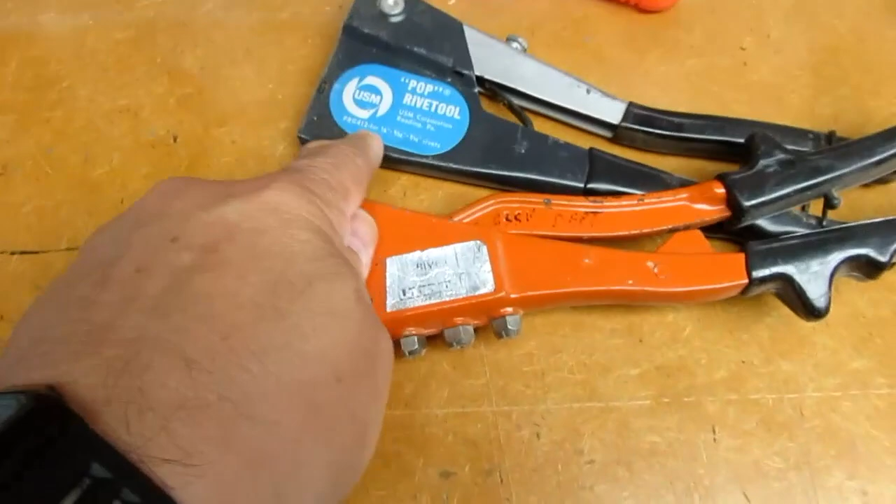In a recent video I did a little bit of riveting, and I lamented that my old pop rivet tools, although they were adequate in other riveting jobs I've done in the past that used smaller rivets, were getting a bit outclassed, and so I bought this still relatively inexpensive Arrow RHT300 swivel head rivet tool, which, like this one, but unlike the USM one, which only has two dies, this one does have the four common smaller sizes, just like this one does.

And I was finding that it was very difficult with the larger rivet, and I grant you a little bit of arthritis on my part, to squeeze it hard enough to break the, I can't think of the proper word, the shafts of the pop rivets off. So I was looking around for something a little better, and I had contemplated getting a pneumatic one.

And what I've got instead, I'm going to try it out, return it if it isn't good, is this Astro Pneumatic. It's their extra large Blind Rivet Adapter Kit for an electric drill. And this one takes not only the four common smaller sizes like you'd find in your basic hardware store tools and rivets, it also handles the larger 7/32 and 1/4 inch sizes. So it comes with all the dies for those, comes with the small wrench, and then the tool itself.

Now, it seems like a number of companies sell the same exact item, or at least things that are extremely close to it. So I don't think Astro makes this. I'm not sure they even designed it. But this is what they call their ADR14. And I think there's also another part number for that that I've seen somewhere.

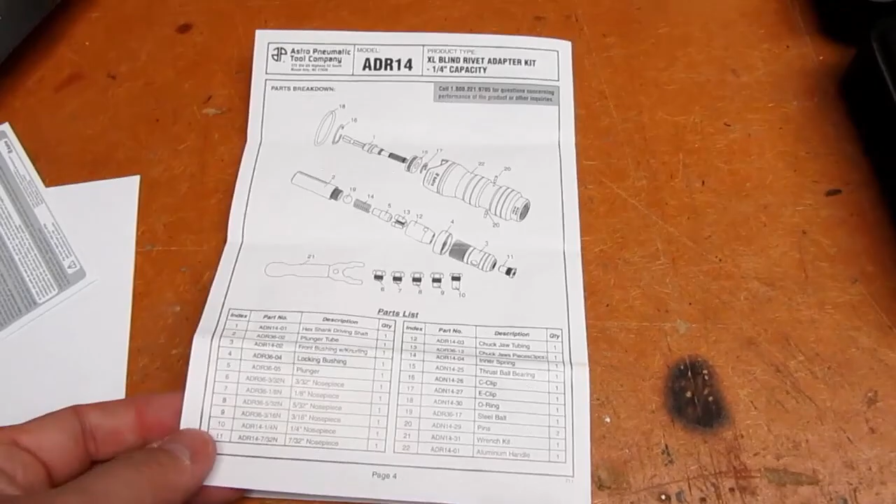So you've got a manual in here, 4 pages. Looks to be pretty good. Good illustrations and so on. And according to the manual, these are called nose pieces. I was calling them dies. Nose pieces does sound like a better word. And that's what they call a wrench kit. It's one part. I don't know how that qualifies as a kit. There's the parts breakdown.

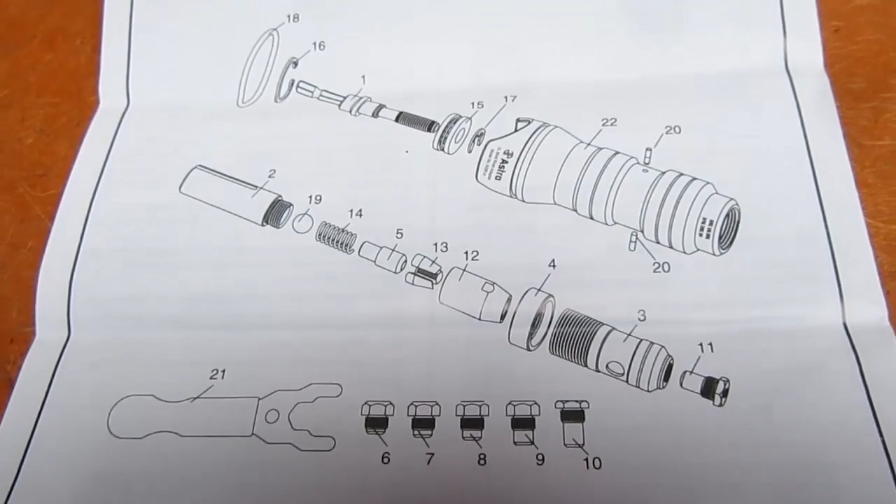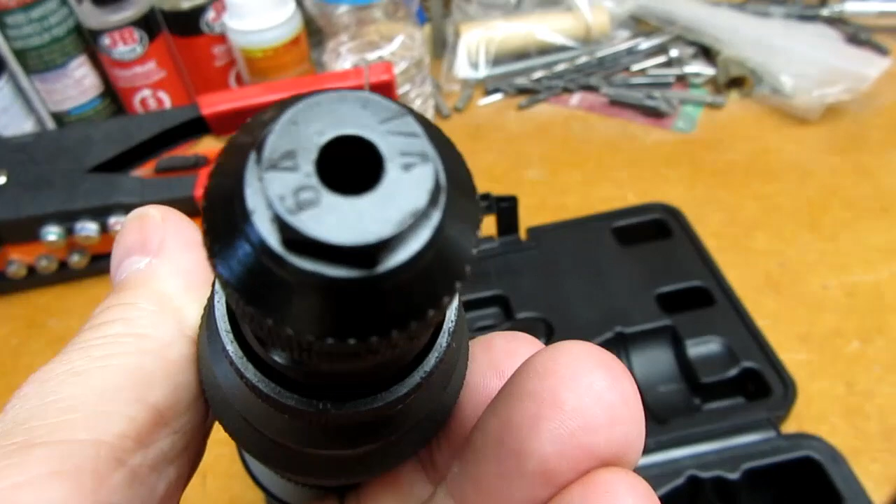The tool itself is apparently machined, although some of it may be part of a casting, I'm not sure. Machined aluminum. It doesn't weigh all that much, but this is where the nose piece screws in. One of the 6 nose pieces, the 1/4 inch one, comes installed on the tool, and then this is where you attach your electric drill using a standard 1/4 inch hex drive, just like any screwdriver bit or anything else you'd chuck up in a drill.

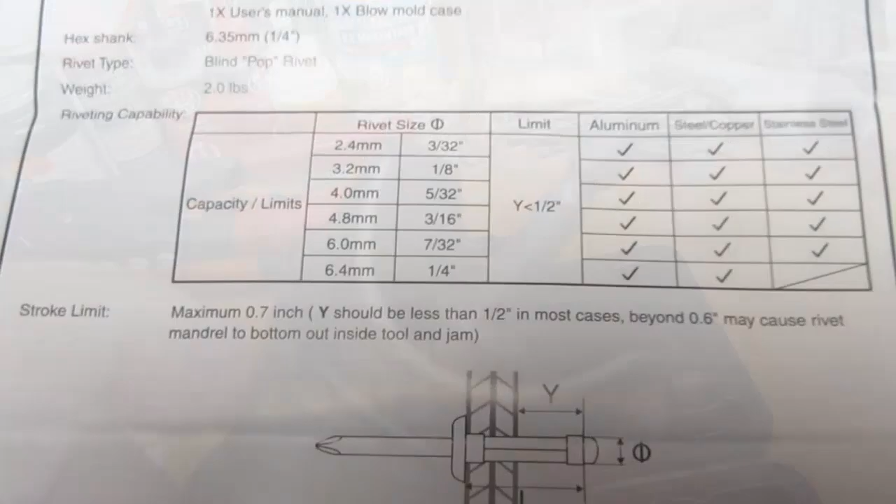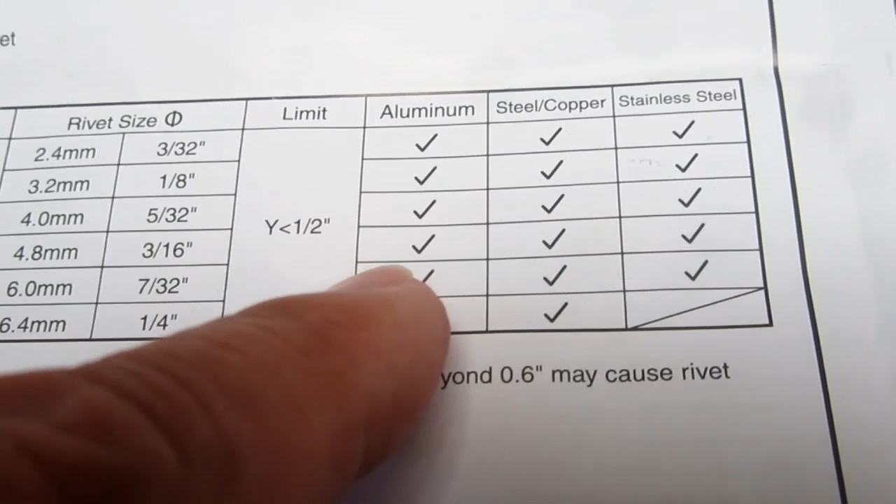According to the manual, the capacity of this tool, and it lists the 6 different rivet sizes here, and it mentions which types of rivet material. You can use aluminum ones in all sizes, steel, copper ones in all sizes, and stainless steel in all but the 1/4 inch size. And there's the so-called Y dimension, must be no larger, they show less than here, but the website says up to 1/2 inch. I guess if you're infinitesimally smaller than 1/2 inch, there's no practical difference.

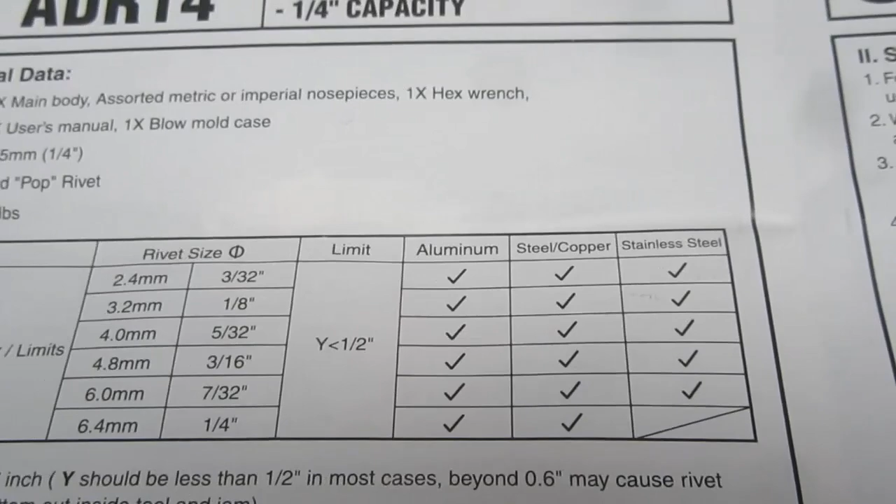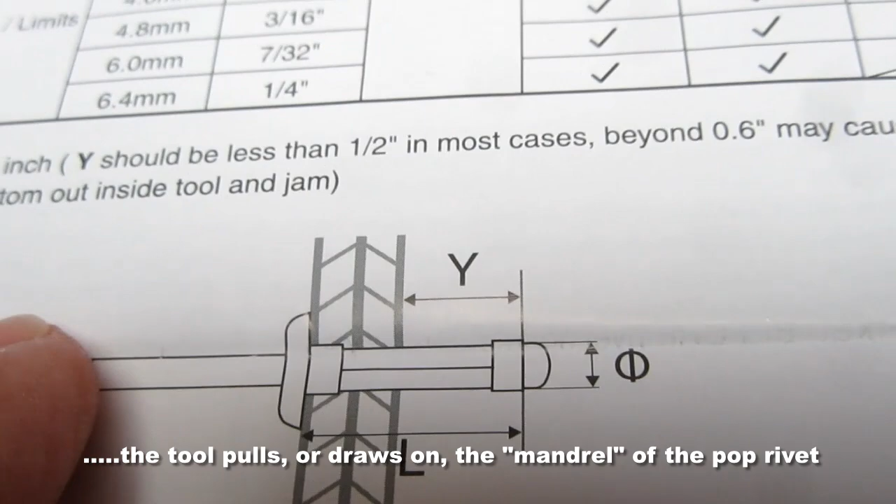And they show what they mean by that here. If you put your pop rivet through your couple pieces of material, the part that sticks out on the far side can't be bigger than 1/2 inch. So that's its draw capacity. I think that's just saying that the tool doesn't draw more than 1/2 inch when it pulls on this part of the rivet. If you selected a rivet that's too long for the thickness of material, you might get to a point where the tool just can't pull this enough to compress this part fully and make a tight joint. So I think that's what that comes down to.

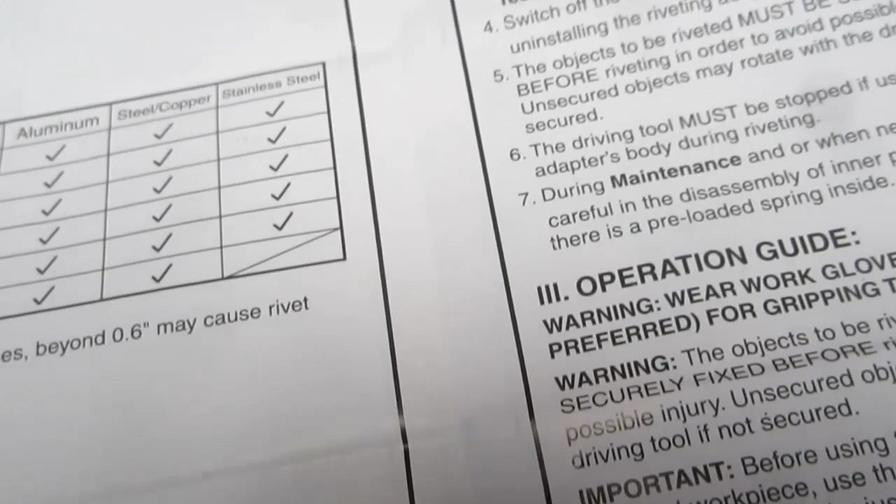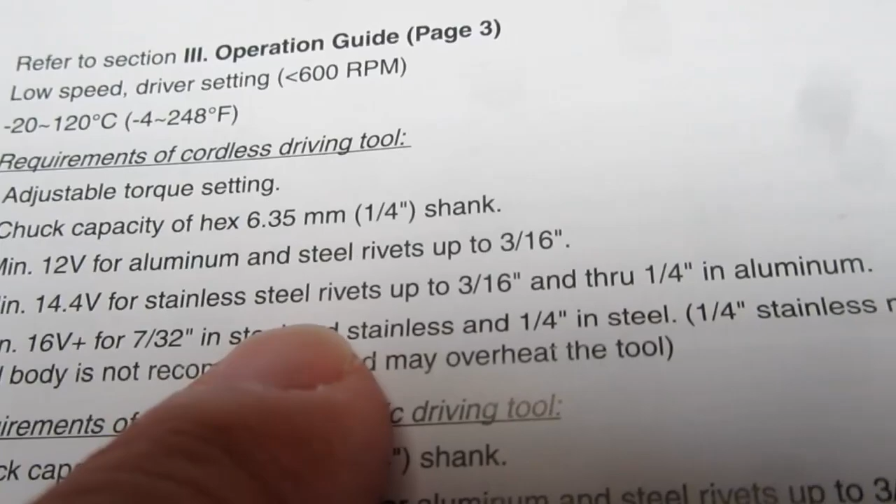So they recommend for the cordless driving tool, doesn't have to be cordless, you should have an adjustable torque setting, a chuck capacity of hex 1/4 inch or 6.35 millimeters, minimum 12 volts for aluminum and steel rivets up to 3/16 inch, 14.4 for stainless steel rivets up to 3/16 inch and through 1/4 inch in aluminum. My go-to tool for this is a DeWalt 18 volt unit, so it should be perfectly capable of anything this tool can be used for. And of course you'd put it in the screwdriver mode, not the drill mode, and the lower setting up here. You can also use it with a pneumatic driving tool.

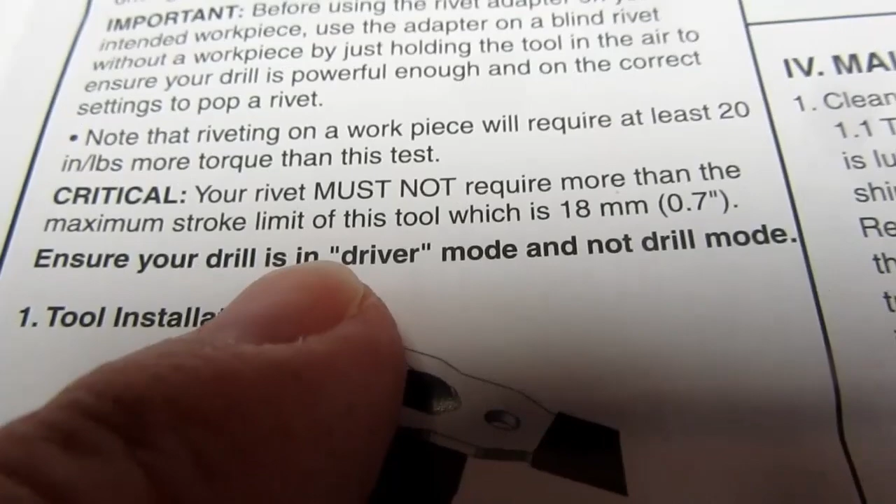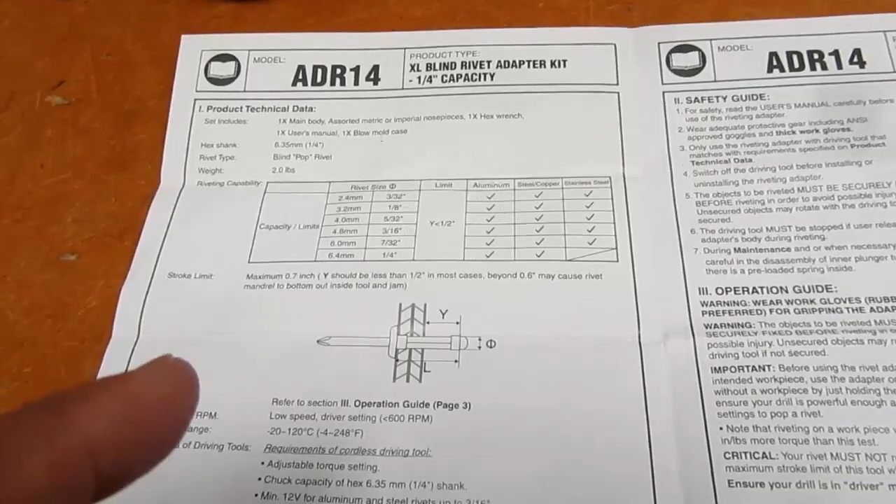Then down here they say your rivet must not require more than the maximum stroke limit of this tool, which is 0.7 inches or 18 millimeters. Now when I was studying the website trying to decide if I should buy the ADR14 or its similar but slightly lesser sibling, I forget what the number is at the end, I think it's a bigger number like 36 or something. That one should be almost comparable, except it doesn't handle the two largest rivet sizes.

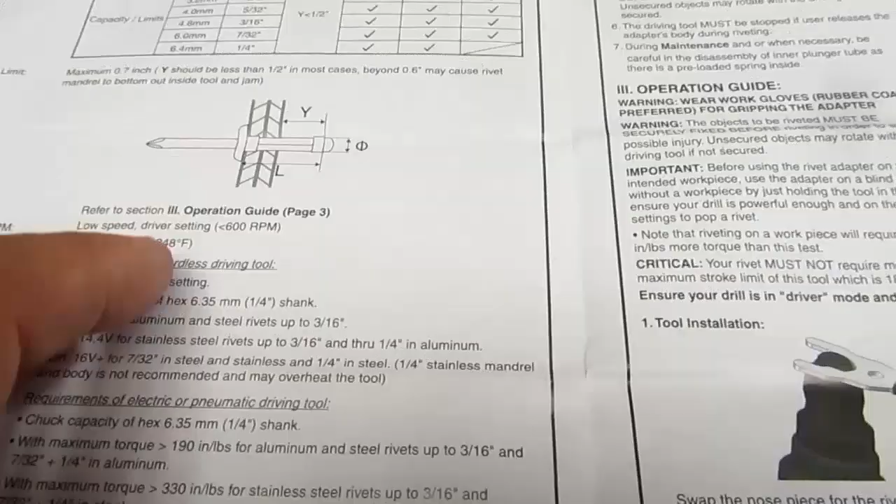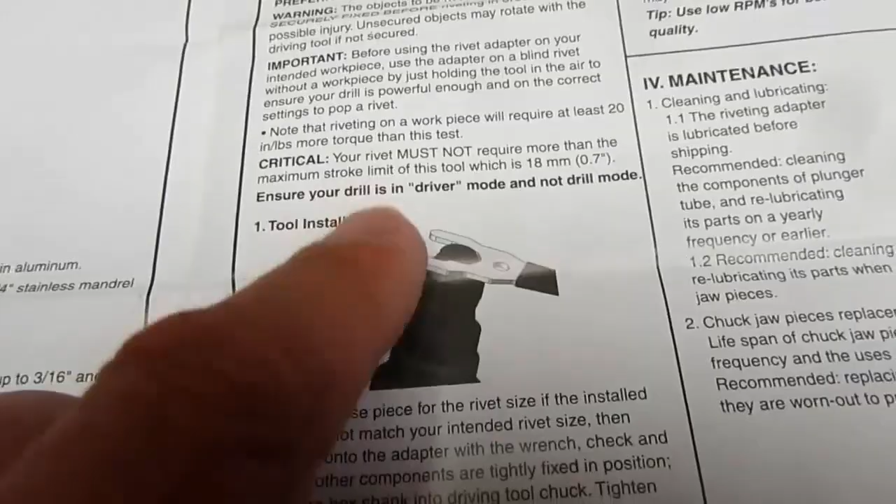That one, on the website, I'm pretty sure it said that the draw on that one was 0.7 inches and 0.5 inches for this tool, like it says here. I wonder if they just forgot to update this part of the manual. It's almost like it's written for the smaller tool in this regard. So I don't think I'm going to believe the 0.7 inch part here. I think that's a mistake.

So I'm going to try this out here. Hopefully the camera will pick up what I need. So I have 3 rivets here, 2 shorter ones and 1 longer. They're all 3/16 inch rivets, meaning that the diameter of the part that goes into the workpiece is 3/16 inch. Now the pin here, I don't know what that is. I had it set up for this tool. Yep, that's the right size. That's a 3/16 inch nose piece that would fit this shank here.

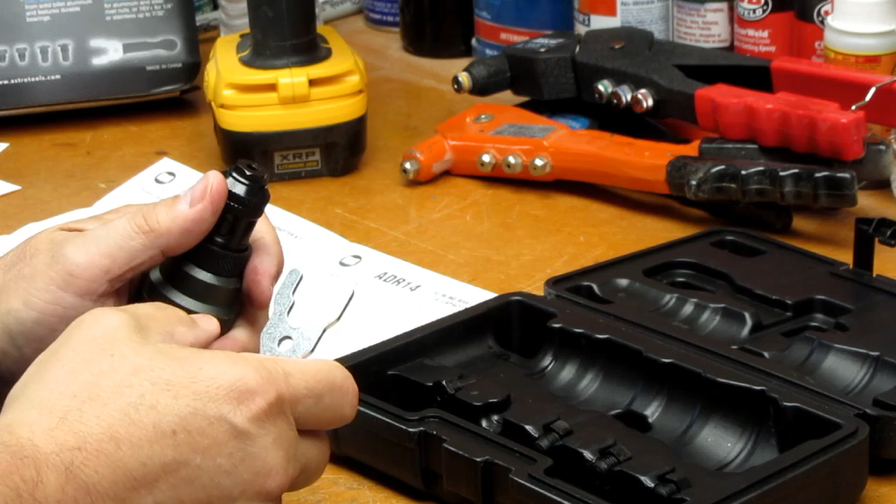Okay, this is a 1/8 inch one. That's not the size I want. That isn't right. Every 30 seconds, I'm striking out here. 3/16. That's the size I need. So I'm going to use the included wrench. Put in the 3/16 inch one.

Had to back off the chuck a little bit here to get it to go in because it was up against the spring. Okay, so that's in there. This whole thing screws apart, by the way. It's all concentric threaded parts.

There's a little porthole on the side here where you can see the actual gripping part of the tool, which is called the chuck jaw pieces, very much like a chuck in a drill press or even a drill like this, except they're serrated, of course, to grab onto the pin of the rivet.

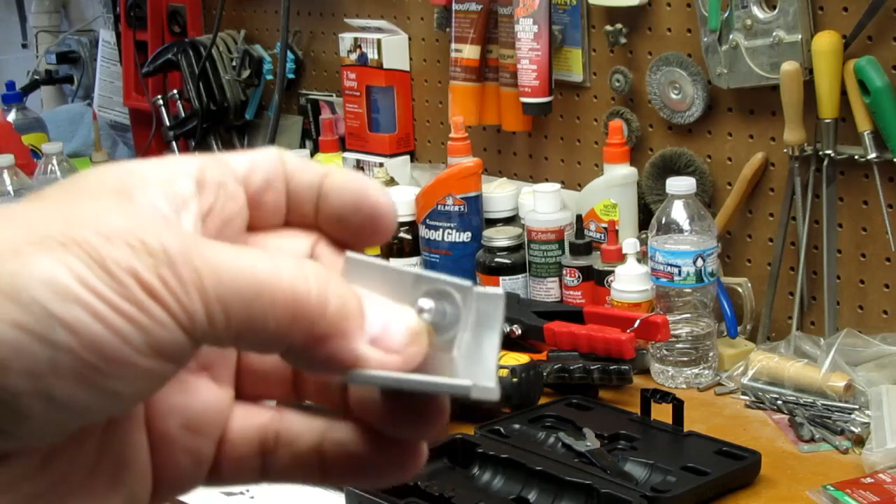So I'm going to throw a washer on there. A couple of these washers to make up a little bit more of the difference. I do a rotation check, make sure it's going clockwise. I put the rivet in the tool. Okay, let's see what happens.

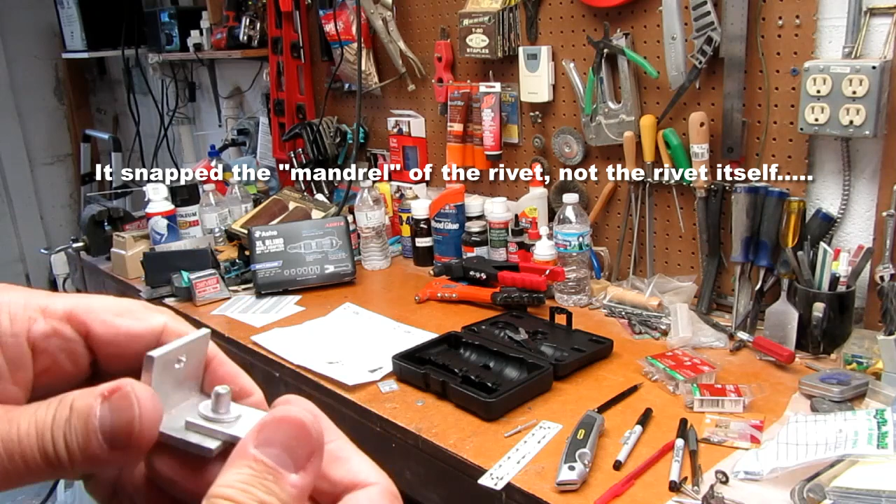It properly snapped the mandrel of the rivet, and this part is on there good and tight. Now to release that broken off piece, I just reverse the direction of my drill. Still a little bit more. Oops. There. Let's try another one.

Rotational check. You really have to hold the tool at least a little bit. And there we have it. It's so tight on there I can just barely swivel it around. There. This didn't actually pop out of there, but it's clearly broken.